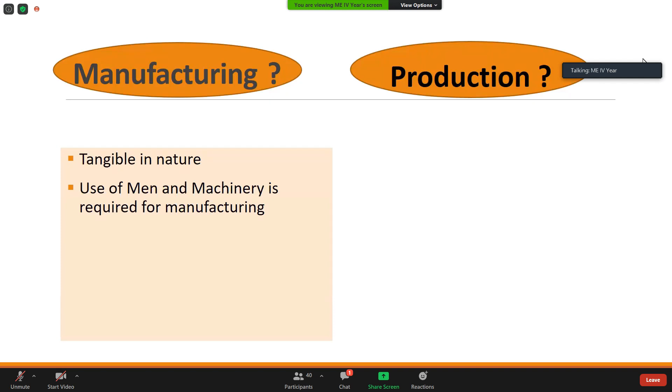You are correct to some extent. So let me tell you, there are tangible and intangible products. Manufacturing always deals with tangible products. Tangible in the sense you can sense them, you can touch them. They are physical objects you are going to manufacture. So manufacturing always refers to products which are tangible in nature, and it uses both men and machinery in order to transform material into one form or the other.

Also, manufacturing is one of the various steps of production. Production is the superset. If I look at the other side, production deals with both tangible and intangible products. What do you mean by intangible? Can anybody quote the difference between a tangible product and an intangible product?

Maybe without having any physical presence, sir. Any example, any mechanical component you can quote as tangible? It can be a bolt, or a nut, or a threaded shaft, or a stepped shaft, or whatever it is, a gear, a pulley. These are all tangible products.

Then what do you mean by intangible product? Human resources? Not exactly touchable, sir, we cannot touch it. See, sir, like our assets, you are not going to develop any physical entity.

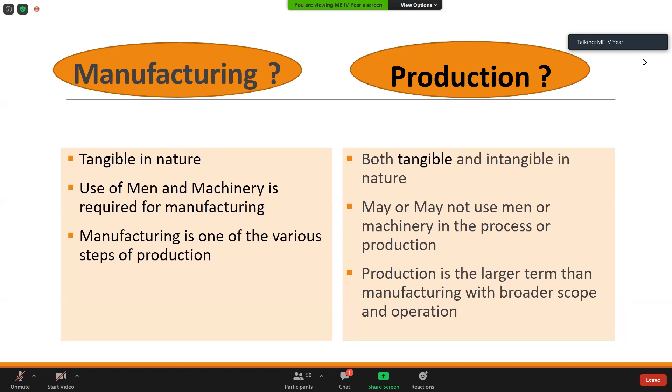Yes, sir. Then what is production management? Our subject here is production and operations management. We consider both terms, production management as well as operations management. Let us see what the difference is.

Production management involves effective use of resources to create acceptable products. What do you mean by acceptable products? Whatever you develop must be useful to the customer, isn't it? So production management involves effective use of resources. What are the resources you have in the industry? Men, material, machine, is it or not? These are the basic resources for conversion of material into a product, so you need to effectively and optimally utilize all these resources. What for? To create acceptable products, meaning they must satisfy customer needs.

So in this case, the raw materials are being transformed into value-added products. Value-added products are those which satisfy customer needs. You are adding some value to the raw material, converting it into a useful product. Be it a product or service, the idea is to create something that strengthens the relationship between organization and customer. If you satisfy the customer, the customer will bind to the organization and become a frequent customer who purchases products developed by your own organization. That much satisfaction you are supposed to give.

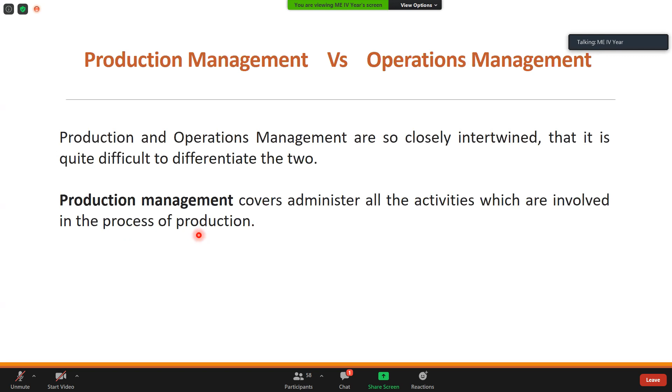What are they? Production management covers and administers all the activities involved in the process of production only - it always deals with the production process. Whereas on the other side, operation management entails all the activities involved in the production of goods and delivery of services, such as material management, quality management, maintenance management, process design, product design, and so on. All the other activities of the industry come into the picture here. So production management is a part of operation management.

Production management is restricted to only the process of production.

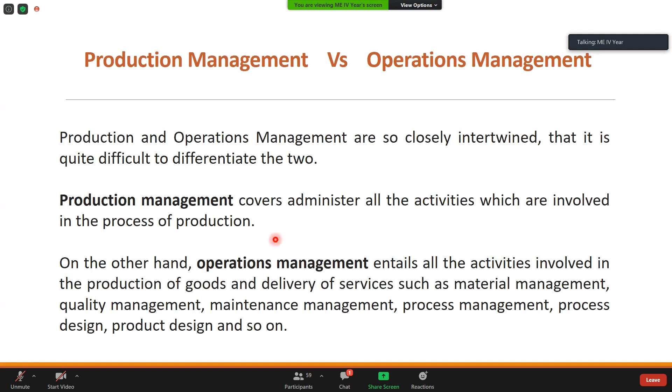Now let me define the combined term, production and operations management. How do we define that? Production and operation management is a process which combines and transforms various resources into value-added products or services in a controlled manner. I hope you understood the definition here.

Which combines and transforms various resources—men, material, machine, money, management, everything comes into picture here. So the combination of all these resources, what for? To transform them into value-added products. It can be a physical product or it can be a service.

In hospitals, we are not going to manufacture anything. It is a service-oriented activity. There also, we are going to use different resources, combined to transform them into value-added service. It can be a product or it can be a service.

In a controlled manner—why are we using this controlled manner? You need to offer the product or the service to the customer at an economic price, and you have to deliver the goods on time. So there must be time optimization as well as cost optimization and effective use of resources. That's the reason controlled manner is added here.

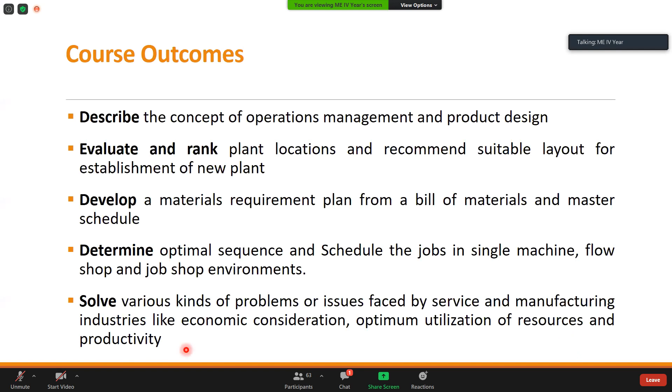Now let me start Unit 1. The title is Operations Management. In Unit 1, mainly we discuss 3 parts, as I told you already: production systems, historical development of operations management, and the third one is product design. These are the 3 important topics in Unit 1.

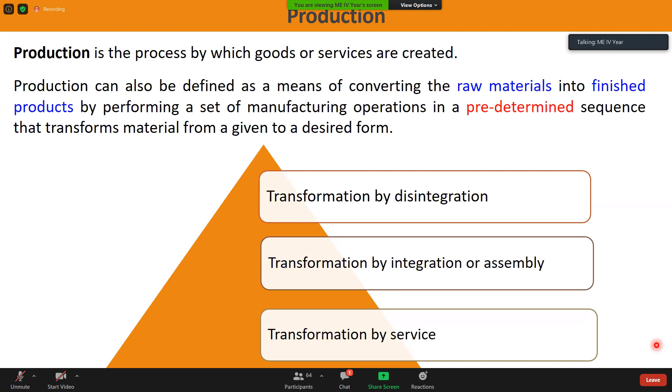Transformation by disintegration, a production which is transformation by disintegration, what do you mean by that? Here, essentially, there is only one ingredient as input, but with this one input we will get several outputs. Can anybody give me an example? Raw material is only one input, but you are producing several outputs. Any example? Welding.

I mean, is welding a joining process, an integration process, or a disintegration process? Welding, it's an integration process. Yeah, I'm asking about disintegration. Machining process. Machining process, right?

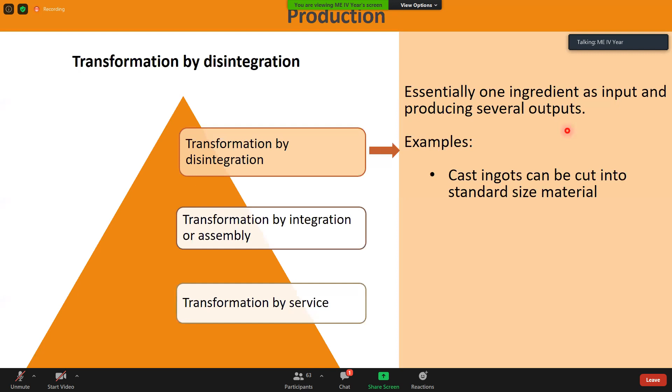So let me give a few examples. Cast ingots can be cut into standard size material. I have ingots, cast ingots, I can cut them into a standard size material, billets, isn't it? Or this standard size material I can use on machine tools, maybe to develop shafts or bolts. Different types of components I can make. I can make a gear.

Before you make a gear or a shaft, you use standard size material so you don't waste material. Cast ingots are cut into standard size material, which you disintegrate. From this standard size material, you develop several components like pulleys, gears, shafts, bolts, screws, or whatever it may be.

By smithy and forging operations, the raw material is only one, and you produce different components out of it. I can use a single sheet metal and produce a number of washers out of it. Sheet metal is the only input, but I can develop 100 washers from that. This way of producing products is called transformation by disintegration.

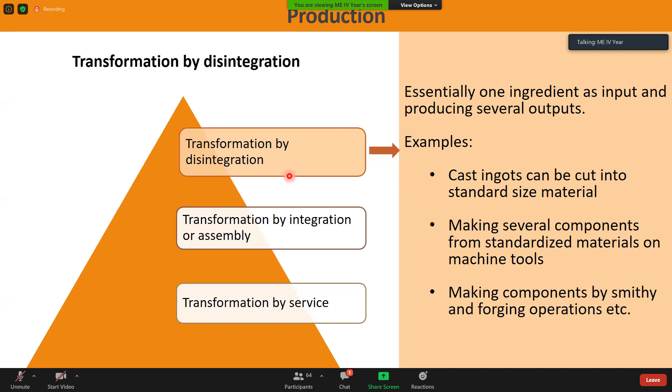Next, transformation by integration or assembly, wherein several components are inputs but essentially one product is the output. Can anyone quote an example? Making an engine design has many parts that integrate. Car, automobile - yes, good. Any other? Engine. Phone.

In your day-to-day life, you will see a number of such assemblies made out of combination of several components - mobile phones, automobiles, water bottles, electronic gadgets.

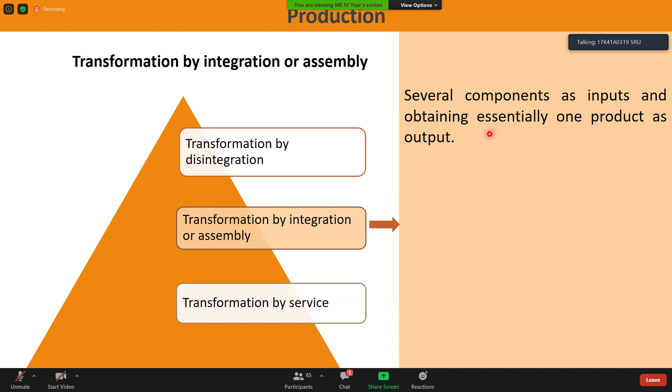If you take a lathe machine or milling machine, is it not an assembly? Several components are there in that. You have number of household appliances - it can be a mixer, an oven, or a geyser. Number of household appliances are the assemblies we have.

Automobiles, radio or television sets - these are all developed by transformation by integration or assembly. You are integrating several components into a product, so inputs are many but output is only one product.

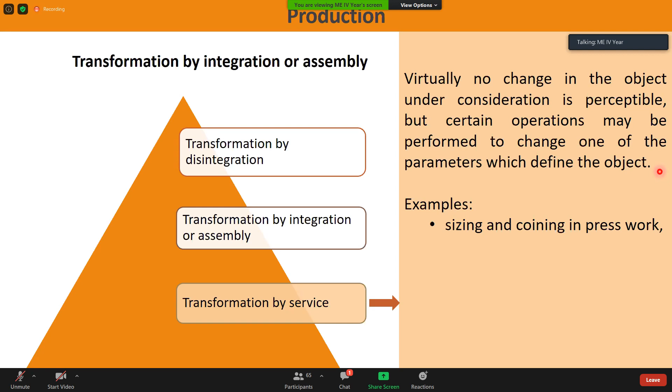This is transformation by service. You are not exactly machining any object here, but making slight modifications in the input to make it a useful product. Or it can be servicing or light repairs of automobiles - you are not going to manufacture the automobile or any component of it, you are just providing servicing or repairs. Still, I can consider it as production because it is transformation by service.

Transformation by service can also be loading and unloading of trucks - still I consider it a production activity. Production doesn't always mean developing a physical, tangible product - it can be intangible also, like transporting from one place to another, which gives place utility. I may be moving material from one location to another to better utilize the space. All these are servicing. Apart from this, hospital servicing or restaurant servicing also come under this - they're all transformation by service.

So we discussed transformation by disintegration, transformation by integration, and transformation by service. All three come under production only, whereas manufacturing deals only with tangible products - only the first two are covered under manufacturing, while the third is covered only under production. When you put all three together, that becomes production. Only the first two means manufacturing. Are you clear with that now?

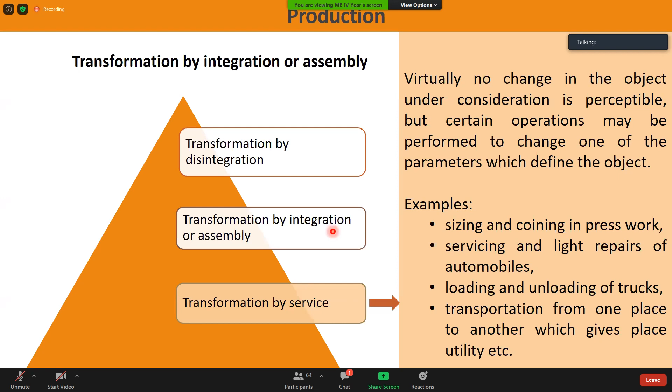Yes, sir. Yeah. Yes, Now, sir.

Let me show at a glance the entire production system. There are inputs. What are the inputs? Men, material, machines, information. Information can be a planning activity or a design. It can be capital, the finance resource required. So all these become inputs in the production shop floor.

Now here the transformation is happening. How? The transformation process includes product design, process planning, production control, maintenance. All of them come under the transformation process. So output would be products and services.

Now here, always there is a feedback. Feedback about what? Once you start developing the products, you always need to monitor what is the existing inventory. Do you have sufficient raw material? Or do you have sufficient semi-finished products? Or do you have sufficient finished objects to meet the demand? So this inventory you have to always monitor.

And then quality. Quality is another feedback. You need to have an inspection process for the products. In case of services, you need to take feedback from the customer. So that feedback should always be given.

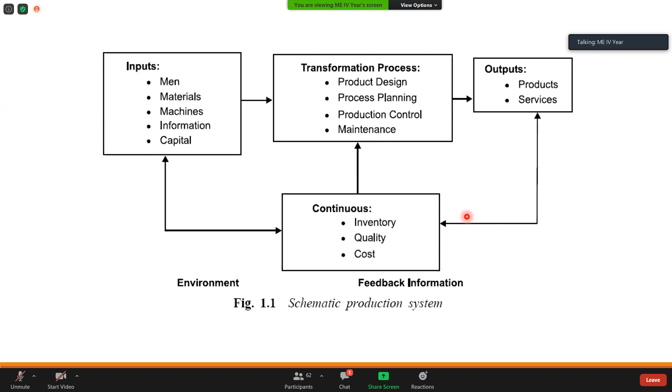So now, the production system has characteristics like it is an organized activity. So every production system has an objective. What could be the objective of a production system? In any industry, there can be different objectives. What will be the objective? Objective may be optimizing the performance, that is increasing the productivity. That can be an objective.

Once you improve the productivity, obviously cost will be cut down. Productivity is nothing but how much output you are getting for a given input, isn't it? So unless you effectively utilize your resources, your productivity will not improve.

So improving the productivity is an objective of your industry. Next, the production system transforms various inputs into useful outputs, whether it is a tangible product or intangible product. And it does not operate in isolation from other organization systems. Production shop floor people cannot work in isolation without considering other organization systems. Like they need to consult with the marketing department, the finance department, the human resource department, the design department. Unless they consult all these people, production will not be smooth.